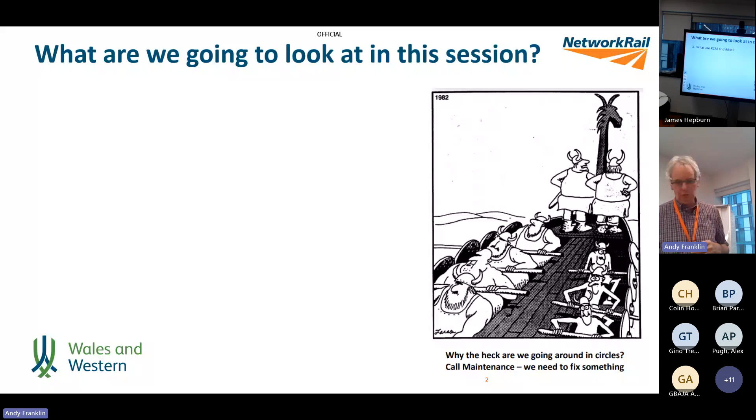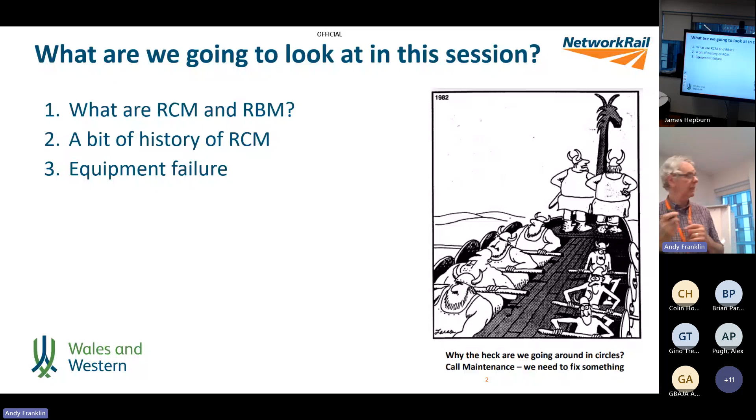And we're going to talk about what reliability centered maintenance is and why it is a very powerful tool. So we're going to talk about what is RCM and risk-based maintenance, as Network Rail call it. I put a little bit of history about RCM just so you can see where it's come from. We're going to talk about equipment failure and the key RCM questions. We're going to talk about functions and performance standards, because it's functions that we're looking at in the context of this. It's the functions of a piece of equipment, because RCM is not railway specific. It's an agnostic system. So it's the functions of that system we want to look at. The functional failures and the failure modes. So what happens? We'll have a little look at P to F curves and some RCM tasks. So this is quite a high level look at it, but I think it'll give you a flavour for how it works and why the railways adopted it.

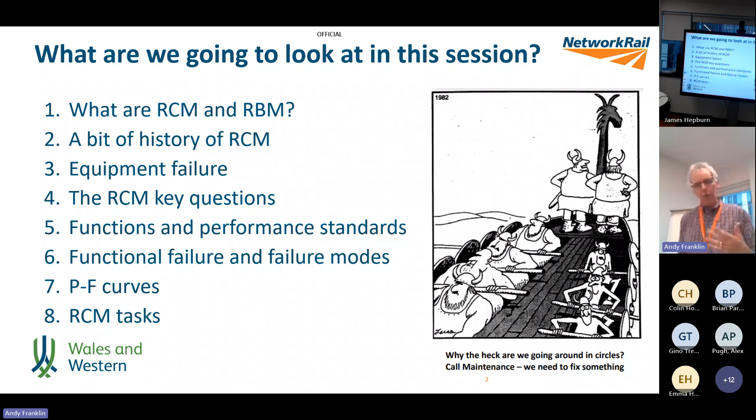So we've got two things. So reliability centred maintenance. This is an extract from a Network Rail standard: an established process which defines what maintenance is needed in order to allow an asset or system to meet the business need within a specified operating context. An operating context is really important, as we'll see later on. So that's the process, RCM. Network Rail call their version of it risk-based maintenance. So the description describes a quantitative, financially based analytical technique that establishes the relative worth of various maintenance tasks and serves as a continuous improvement tool.

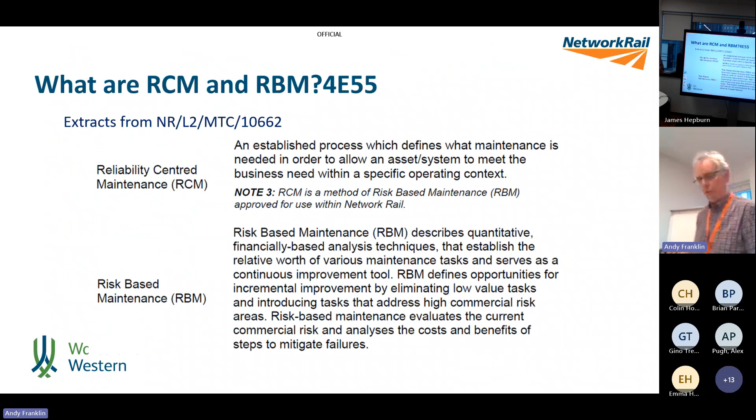And we had a very good talk on continuous improvement a while ago, didn't we? And it eliminates low value tasks and introduces tasks that address high commercial risk areas. Risk-based maintenance evaluates the current commercial risk and analyses the costs and benefits of steps to mitigate failures. And I think that's really important. So we're not just talking safety here, we're talking about performance risk, we're talking about reputational risk and things like that.

And this is an extract from a report from Nolan and Heap, which is one of the big reports. So the traditional approach to scheduled maintenance was based on the concept that every piece of equipment has a right age at which a complete overhaul is necessary to ensure safety and operational reliability. But the airline industry were the first people to really get into this in the 1950s, and what they found by analysing a lot of data, because by the 50s there were quite a lot of aircraft flying about, was that that is not actually correct. There is no right age for an overhaul. It's more subtle than that.

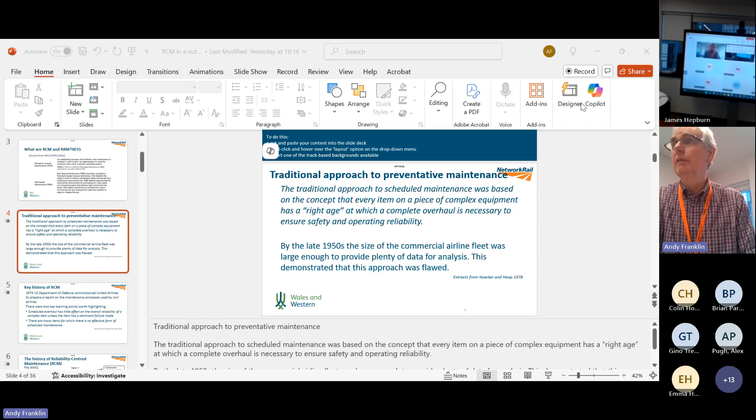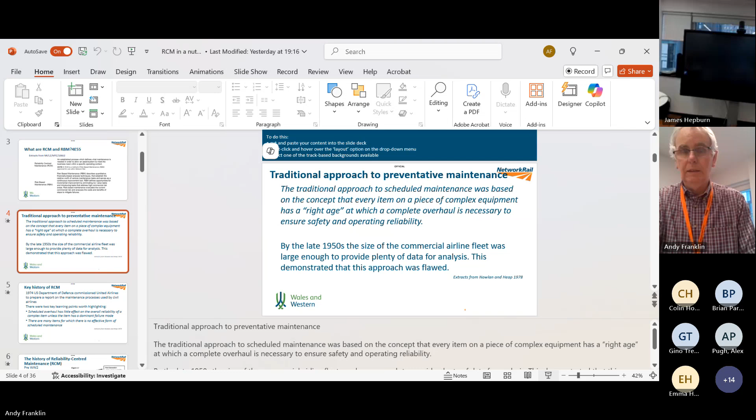So what the aircraft industry started to find was that just doing lots of overhauls didn't solve the problem of aeroplanes falling out of the sky. And they started to have a look in a bit more detail about what they were doing and started to focus in on what the tasks were meant to do, because it became apparent that just taking something to pieces and putting it back together again doesn't really make any difference. In fact, it can quite frequently make things worse.

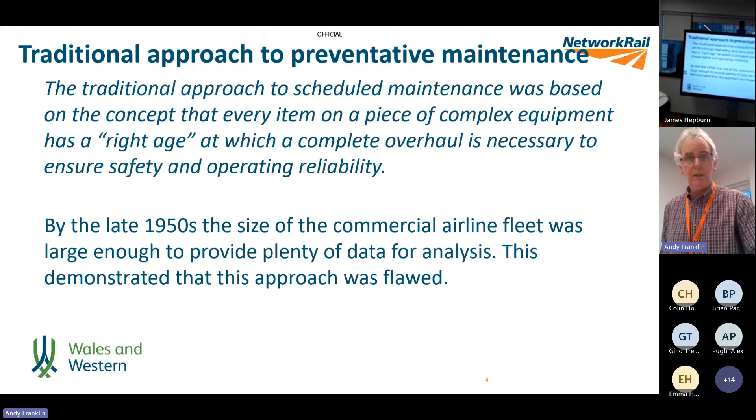And this eventually led to what we now call RCM. The name was born out of a report, Nolan and Heap in 1978. The US Department of Defense commissioned United Airlines, who were one of the big airlines in the States, to prepare a report on what they were doing in maintenance, because they'd started to see benefits coming out of it.

And I think there's two key learning points which are really worth highlighting from that. So the first one was scheduled overhaul has little effect on the overall reliability of a complex item unless it has a dominant failure mode. So there were only certain cases where scheduled overhaul becomes effective.

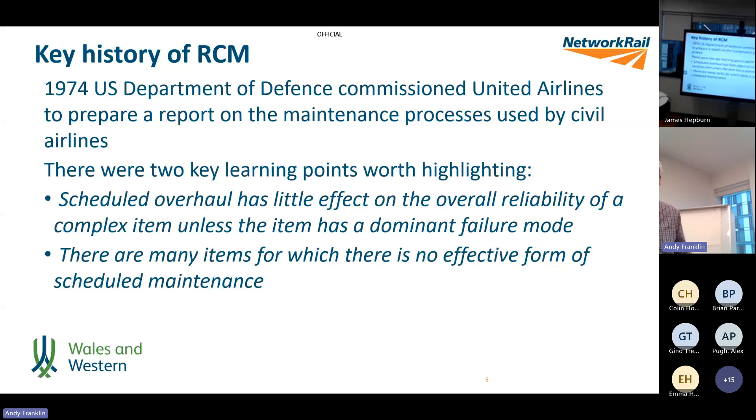And the other big one that came out of it for me was that there were many items for which there is no effective form of scheduled maintenance. So there isn't anything you can do to it which really changes its life. And I think that's quite fundamental to where we're going with RCM. So that's really a bit of background about what RCM is about, and then we'll look at how the process works.

Right. So in RCM speak, it's split into three eras. So pre-World War II: labour was relatively cheap. We're talking about going right back in time now. Mechanisation was relatively low. A lot of people were employed in factories, working on the railway and all these other things. The designs of machinery were quite simple, steam locomotives in the railway context. And they tended to be quite over-designed, which meant there was a bit of redundancy in the system, so they didn't fail very often. And they were quite easy to repair as well, so there was a minimum of downtime.

So regular maintenance wasn't particularly a driver of things at the time, and a lot of businesses worked on the basis of when it breaks, fix it. World War II and the aftermath really started to change things. We started having a real shortage of manpower because manpower was tied up in other stuff. And the demand for goods started to really grow. So we started to increasingly mechanise factories and systems and processes.

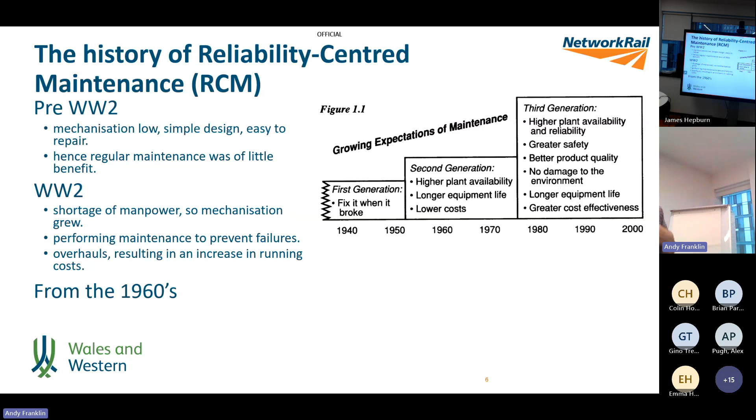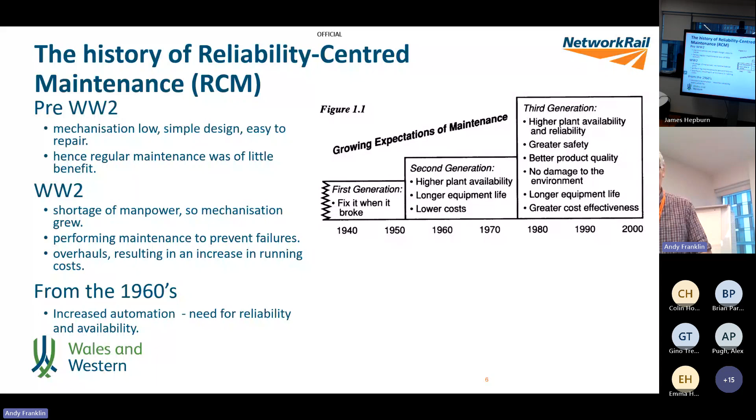And then again, from the 60s, things changed again, because we'd started developing these processes in the wake of World War II through the 50s and into the 60s. Since the mid 70s, there's been a real change in industry, particularly process industry. Downtime has always affected productive capability of physical assets by reducing output, but the combination of increased operating costs and interfering with customer service made it more important to industry to have reliable, predictable outcomes. So reliability and availability are now concepts which are really important to industry at large.

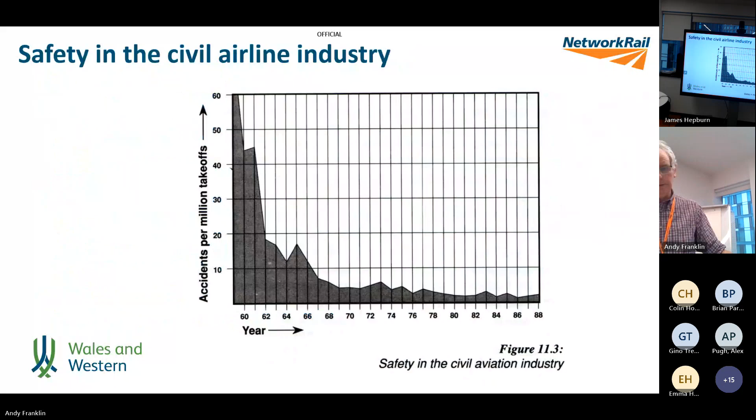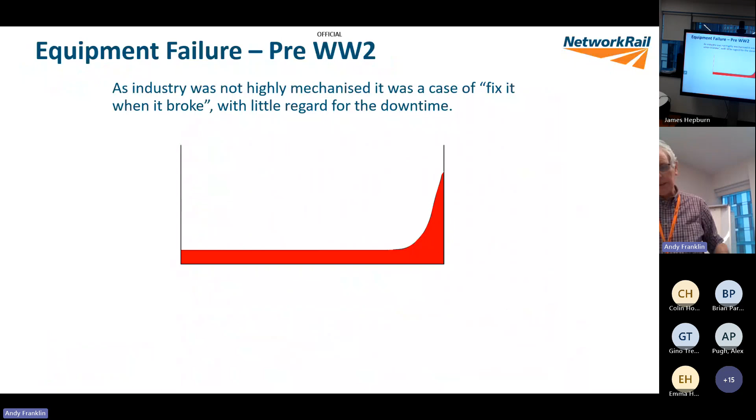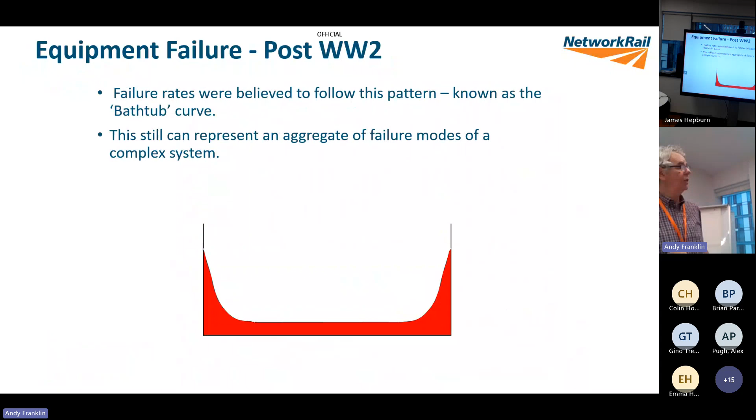Okay, but the studies actually started leading into other things as well. So another popular thing, many of you probably recognise this as the so-called bathtub curve. So this is post-World War II. Failure rates again were believed to follow a pattern known as the bathtub curve. So lots of early life failures when the thing's first installed, then it settles down to some fairly steady state, and then you get a lot more failures towards the end of the life of the thing. But in fact, the research found that there are 6 failure patterns. And we'll look at each of those in turn now, in the slides.

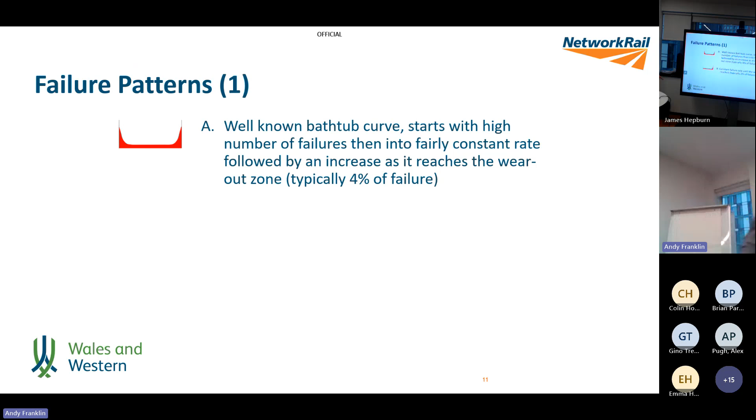So the first one is the bathtub curve. It starts with a high infant mortality, decreases to a fairly constant rate, and is followed by an increase towards the end of its life. But actually, only about 4% of systems follow that, and it tends to be more complex systems as well. So this is the next one they found, which is a constant failure rate until the wear out zone is reached. This is the one that was favoured before World War II, that it's going to be reliable to a certain point, then you need to intervene and do something. In fact, 2% of things actually follow that kind of a failure model.

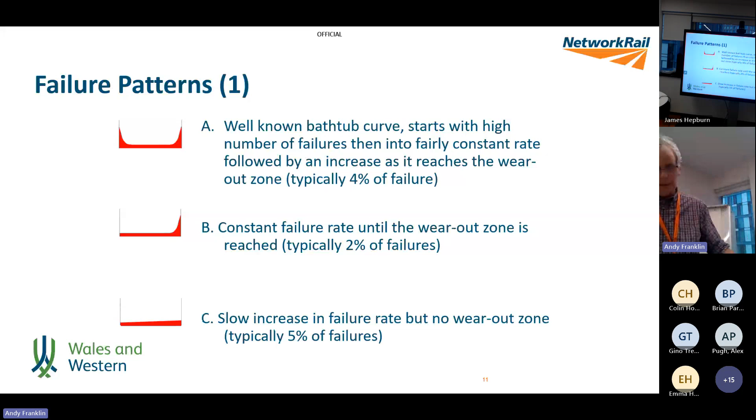Model C was a slow increase in failures. So it gets slowly worse over time, the increase of failures, but again, only 5% of failures actually fall into that category. Another model that came out: you have a low failure rate when it's new, but then it rapidly increases and you have a constant failure rate throughout its life. But again, only about 7% of systems actually follow that. So that was quite specific.

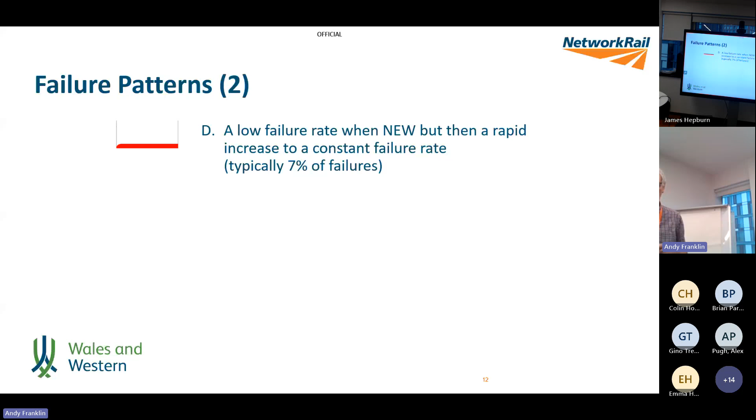Constant failure rate. So it fails at any age. It's not an age thing, it's just a random failure. And as you see, we're getting into bigger numbers now, so 14% of those things. So there's no life. There's no particular point to intervene. They just fail randomly.

And finally, number 6, F. It begins with a high failure rate. So this is the sort of bedding down when things are all new and getting to work. It settles down to a fairly constant level, but there is no wear out zone again. It's just pretty much constant from there. And 68% of cases actually follow that kind of a model. So there isn't any clear point at which you want to intervene. There's not a wear out zone or anything like that.

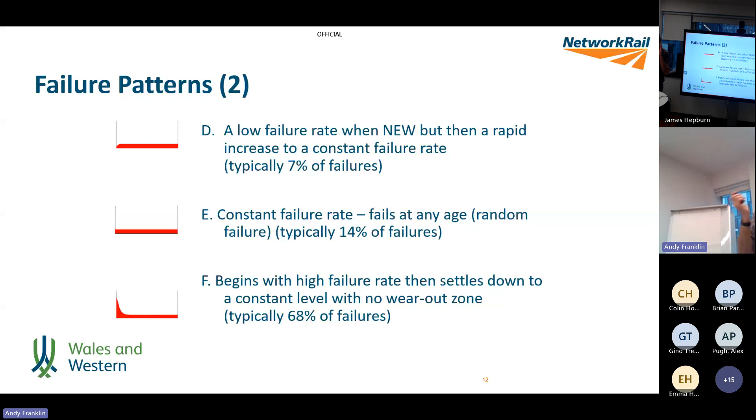Okay. So that's really the basis of starting to think about, well, what do we need to do then to improve reliability and performance? So in RCM, there are 7 questions you have to ask yourself.

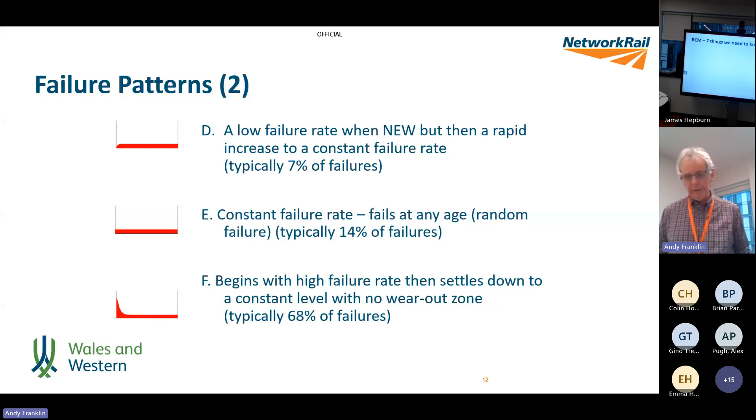So you could actually use the RCM process in the construction of something new. The Boeing 747 actually had RCM principles used in its design and construction. That's been proved to be one of the safest aircraft ever, really. Possibly slightly better than some of the newer Boeing creations.

But the questions you've got to ask yourself first: what do we want it to do? And are there any rates or tolerances around that? So can we fix what it is we want to do? And if we can, particularly be numerate about it, not just we want it to work all the time. We want it to work 99% of the time or whatever. How does it fail to do what we want it to do? So having identified what the function is, how do we lose that function?

What causes it to fail that way? So what are the root causes behind the loss of functionality? What happens when it fails in that way? Because clearly the consequence is going to have an influence on what we want to do about it, isn't it? When it fails in that way, does it matter? So what can we do to prevent or predict this type of failure? So what tasks, and you'll see about the tasks and things that we can do in it.

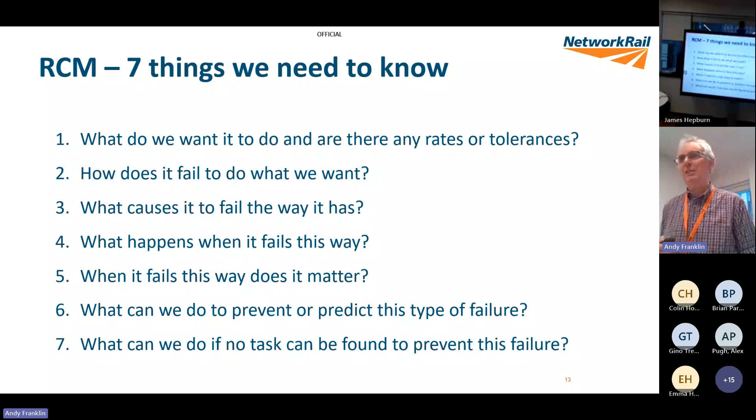And what can we do if you can't find a task to prevent this failure? So they're the 7 questions which form the underpinning. They all look quite easy, but answering them isn't necessarily particularly easy. So let's first start with function and operating context.

So we need to determine what the users want to do within the boundaries the asset is expected to operate. And we then need to ensure it can do what the users want to do to start with. So that's really important. So again, it's functions, and then we'll have primary and secondary functions. So why is the asset required in the first place? So for an example, an office chair. A primary function of an office chair is to support up to 200 kilograms of occupant in a seated position.

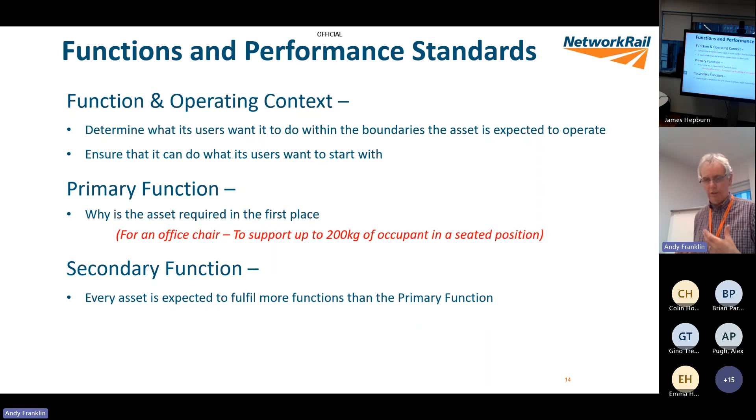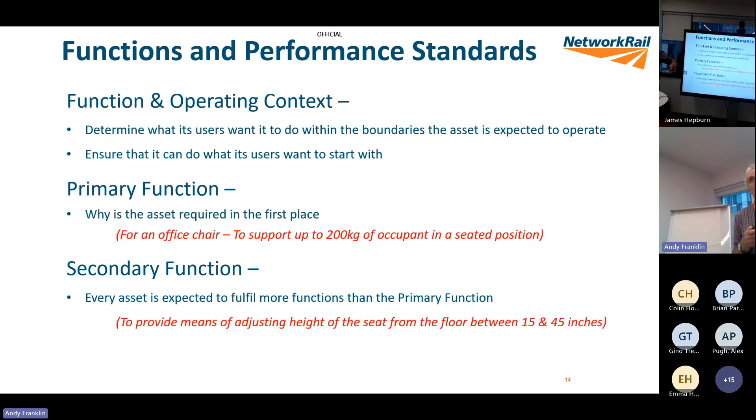So that's a simple primary function. But most things have many functions and they'll have secondary functions as well. So every asset is expected to have more functions. For our office chair, another function might be to provide a means of adjusting the height. There's probably a requirement for it to be safe, isn't there? One leg and a disc is a stool, you can sit on it, but is it safe? Things like that. So we end up with a lot of functions, and a lot of the analysis goes into thinking about what the functions are and how the functions can fail.

Okay, all follow it so far? It's all gone very quiet in there.

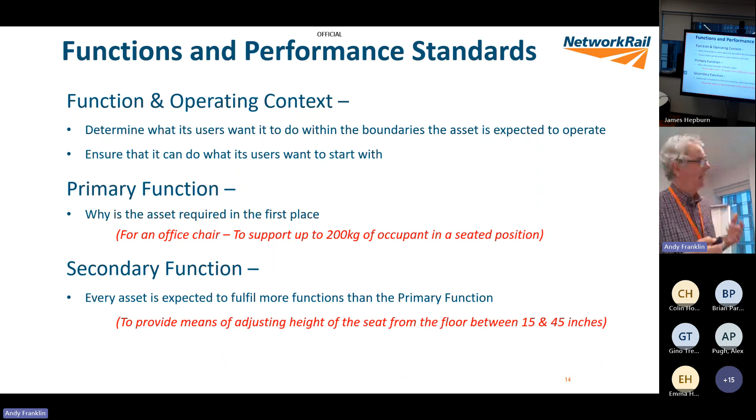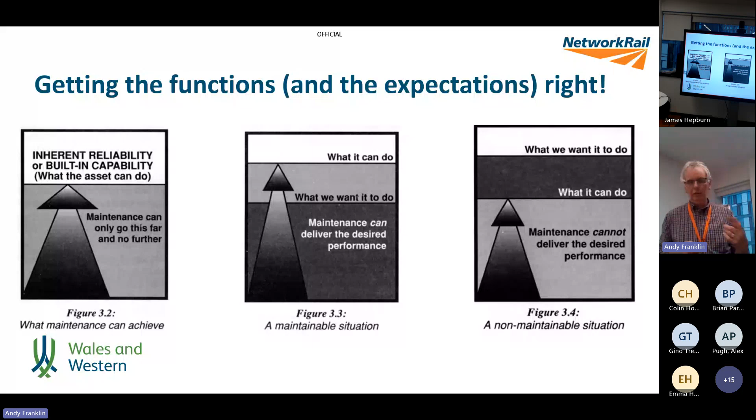But frequently we end up in the third situation, don't we? What we want it to do is up here. What it actually can do is here. And that's as far as maintenance can take it. We need to be very conscious of that, so when you start applying RCM in the real world, is this asset actually going to do what you want it to do anyway?

So take an example of a bridge: you want to run 25-ton axle weight traffic over it, but it was designed for 18-ton axle load. Just upping the tonnage going across it is too simplistic, isn't it? Because you sacrifice things. You either sacrifice life in terms of fatigue damage, or we have to have enhanced maintenance or whatever. So it's quite important to remember that maintenance can only achieve what the thing was designed and intended to do. And that's really, really important.

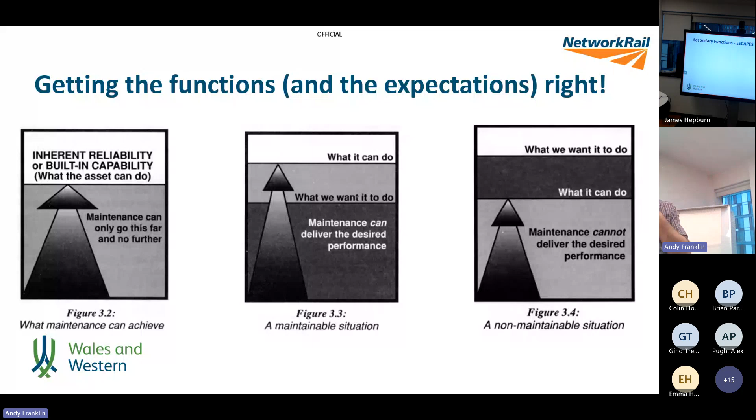So secondary functions cover a wide range of things and are often described by the mnemonic ESCAPES. Their relative importance will be dependent on the primary function and the operating context, and we'll look more at operating context. So E is environmental integrity, S is safety, C control, containment, comfort, A appearance might be important with some things, P protection, E economy, efficiency, and S is superfluous functions. So these are things which aren't directly related to what the primary function is, but they are things which are still important to the user.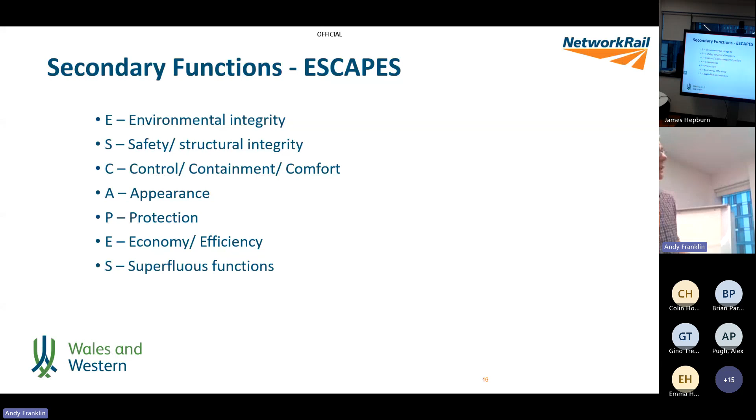Okay. So what does that look like in terms of railway? If we think about the functions of track, we spent a lot of time analysing track, and we ended up with 18 functions, and we've got 6 here. So obviously this is a pretty primary function, isn't it? To support and guide trains with the published axle load, line speed, and million gross tons per annum. So again, making it numerate. We want to support and guide trains, but we also want to do it without restrictions for weight, without restrictions for track geometry and things like that.

Must continue to operate in all local weather or seasonal variations. Must be a safe environment for anyone on or about the railway. Must provide an acceptable level of comfort to passengers. So we're getting into secondary functions now. Must not pollute the surrounding environment. And then there's clear secondary functions like provide a traction current return for the overhead line and third rail systems. So there's 18 functions in all. Some of them are just to do with mounting equipment on the track, but I think that gives you a flavour for what we're doing. So these are the functions that we don't want to lose, and these are the functions we then start looking at about how we can lose them.

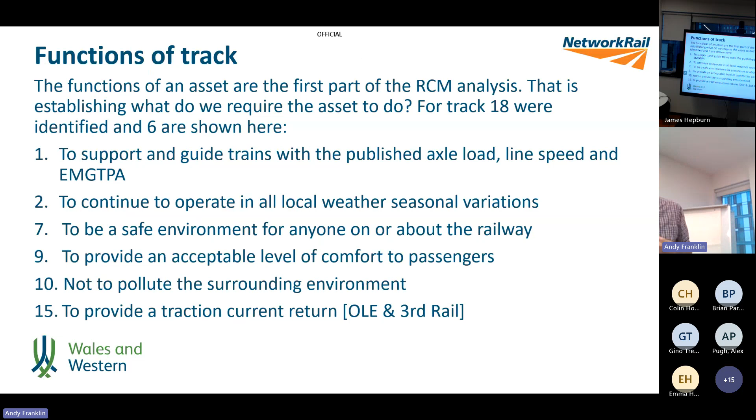So we have functional failures and we have failure modes. When an asset is unable to fulfill the function at the specified rate or within the set tolerances acceptable to the users, then it's said to be functionally failed. So in terms of our chair, we may be unable to adjust the height of the chair. That would be a functional failure, in the context of that. And the failure modes then describe events that are reasonably likely to cause the failed state. You do need to be careful to avoid meteorite strikes when you're doing the analysis, because they do happen, but you've got to be realistic about what's likely to happen. An example of the failure mode for that one would be the height adjustment handle has broken off, so you can't adjust it. The functionality we've lost is the ability to adjust the height, but the actual failure mode is we've broken the handle off.

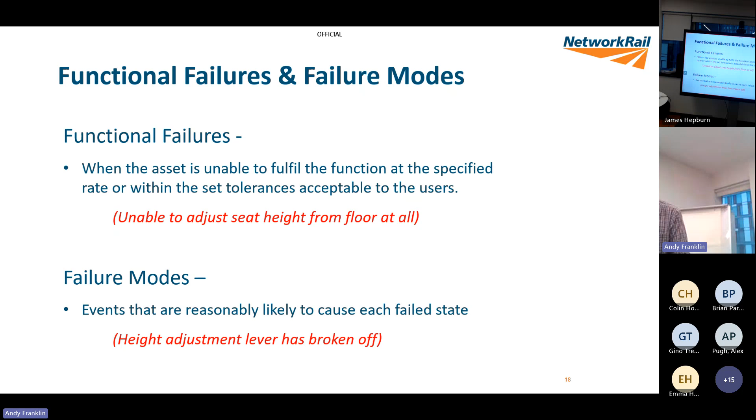So we carry out basically failure modes and effects analysis, or FMEA, and we use that as a step-by-step approach for identifying all the possible failures in a design, a manufacture, or an assembly process, or product or service. So it's quite a lengthy process. Track is actually quite simple because we don't have hidden failure modes. But that's quite a big piece of work, which is the core of it. And then we also do a FMECA, which is the failure mode effects and criticality analysis. That extends the FMEA by including criticality analysis, which is used to chart the probability of failure modes against the severity of their consequences. So hence the importance of knowing the operating context. We keep coming back to that again and again. As I say, I try and avoid meteorite strikes.

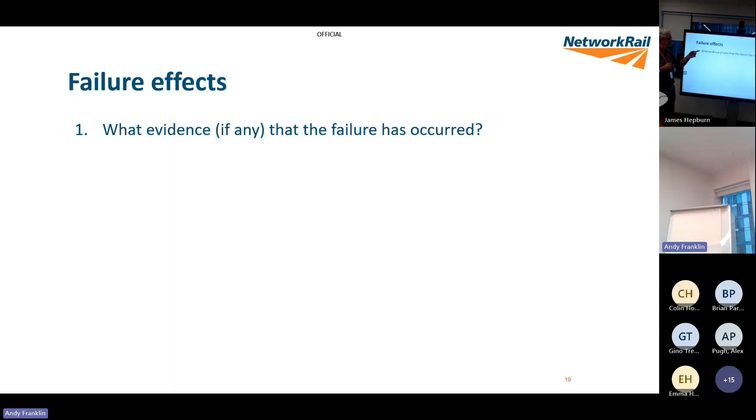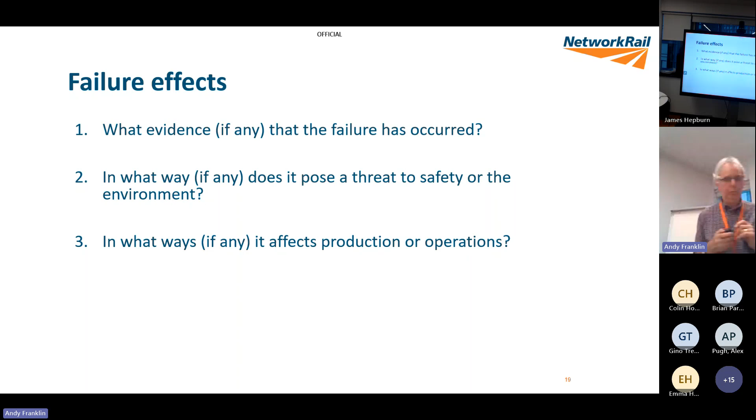So we now start thinking about failure effects. And again, there's a series of questions you ask as part of the analysis. What evidence, if any, is there that a failure has occurred? In what way, if any, does it pose a threat to safety or the environment? In what ways, if any, does it affect production or operations? What physical damage, if any, is caused by the failure? And what must be done to repair the failure?

So when doing your analysis, first of all, is it evident? Is there any evidence of failure starting? So with track geometry, you might start to lose track geometry. That's the start of the failure. You can recognise that, you can measure it. If you can't measure the evidence, you can't really do an RCM analysis on it, because you won't have any time. So an example would be a light bulb. Those of you old enough to remember filament lamps, what's one thing that tends to happen just before it goes?

Gets brighter, doesn't it? Yeah. And is there enough time to do anything about it in that interval? No. So it's not a useful interval. So again, we need to think about this one; clearly, originally it was all about safety, but these days we consider the environment as well.

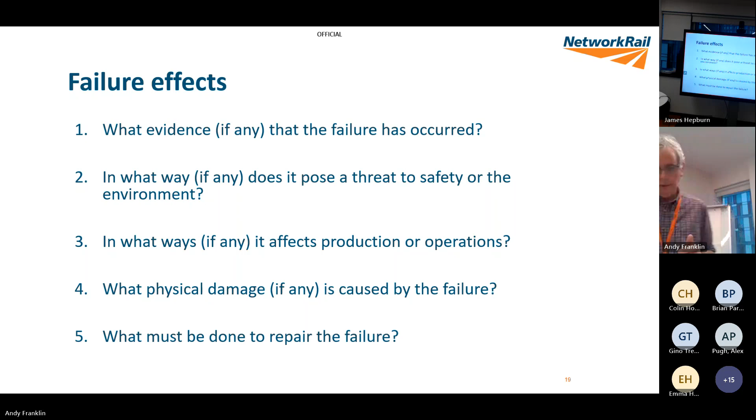And if we think of some of the recent really nasty accidents, Chernobyl, Bhopal, Piper Alpha and things like that all had huge environmental as well as safety consequences, didn't they? So those are the questions that we ask ourselves. And the answers then start to come out in the failure consequences. So we have hidden failures, safety and environmental consequences, operational consequences and non-operational consequences. And these are all quite straightforward, really.

So first one, it has no direct impact by itself, but can lead to multiple failures, which can have serious consequences. And a really good example of that is something like a smoke detector or a standby generator. When do you find out the standby generator won't start? When you need it, don't you? So when it switches over to the standby generator and nothing happens. You find out your smoke alarm isn't working when your house is on fire, don't you?

So you can do things to check that it's functioning properly. You can test it, but you will never know until it happens for real whether it is working or not, won't you? So hidden failures are quite an important thing, and they are something that, as you build complexity into systems, you need to be wary of, because you're introducing new failure modes, aren't you?

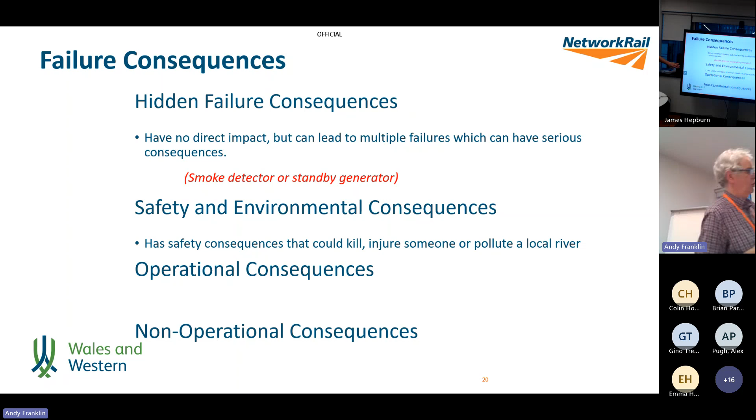Okay. So, right. Safety, environment. So it has safety consequences that could kill or injure somebody or pollute the environment. That's fairly straightforward. And again, if it's got these consequences, you can't just ignore it, can you? You've got to actually take action. Yeah.

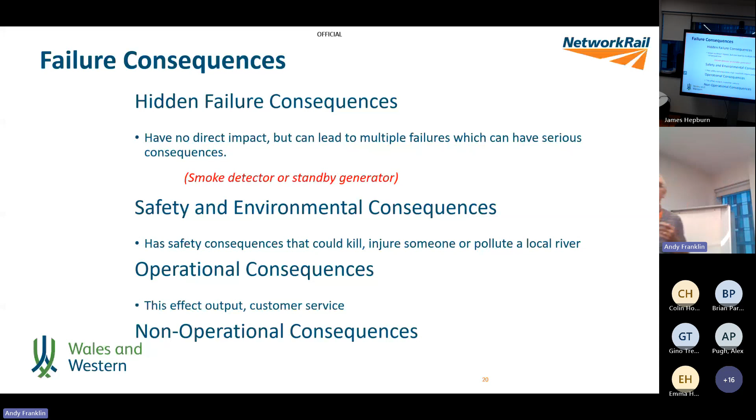Operational consequences. Now, in some cases, there may not be any safety consequences. If you're making widgets in a factory and the machine stops, the world can probably live without widgets. So it doesn't have any safety consequences, but it can really bugger up your operations, can't it, in your factory, or it can stop the trains or whatever. So that's the next level down. We're thinking about that, customer service and things like that.

And then there are things which are evident failures that don't affect the operation and do not increase cost above the repair costs. So these are, if you like, the lowest thing. So yes, it's failed, but it doesn't really have any great consequence. Which is clearly also going to colour what you're going to do about it and how much effort you're going to put into them.

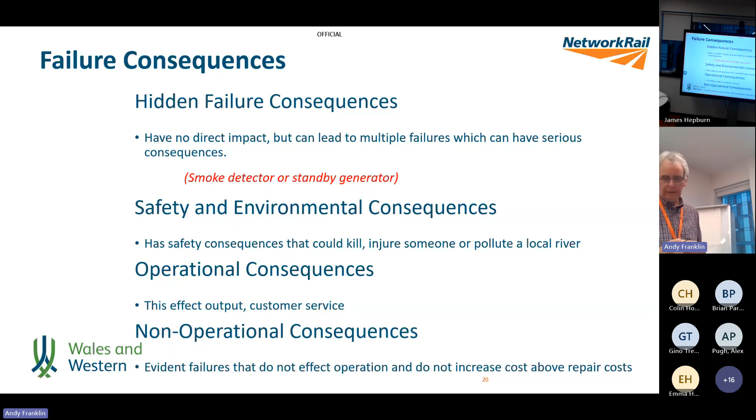Okay. So I say in track, we don't have many hidden failures, but obviously we tend to have things which fail wrong side as well. But we don't have much that doesn't have operational consequences, do we? So if you think of it in a track context, whether it's a broken rail or a rail defect or whatever.

So having done all that analysis, we then, in the context of RCM, start looking at what you can do about this. And we'll come to the charts in a minute, which will hopefully bring it all together a bit more. So we have three different types of tasks, and they're proactive tasks. We have scheduled on-condition tasks, scheduled restoration tasks, and scheduled discard tasks.

So for the vast majority of things, and this is certainly true of track, we get a warning, don't we, before failure. They're called potential failures. And they identify physical conditions which indicate that a failure is likely to occur or is in the process of occurring. So things like vibration monitoring is used in plants and machinery. We use track geometry. So the first report of deteriorating track geometry is a really good warning.

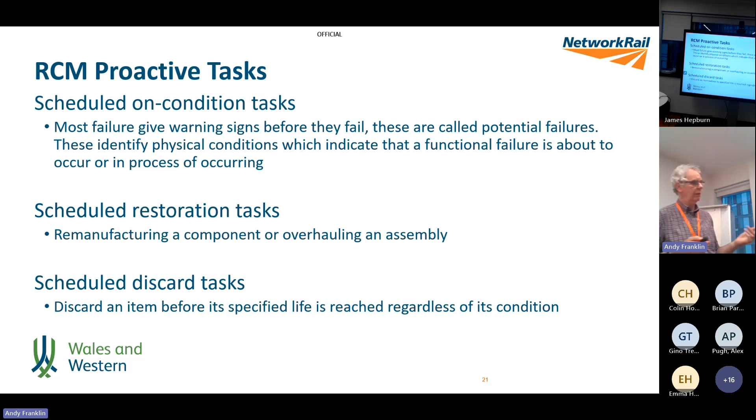And then the final one is a discard task. So we talked about light bulbs, didn't we? So if we do a statistical analysis of how long a light bulb lasts, you can with some certainty produce a good normal distribution, can't you? Very few of them fail quickly, and very few of them go on to enormous lengths of time. So, for instance, something like signal lamps, it's changing now with LEDs, but with signal lamps, you could say, right, I want to catch so many percentage before they fail.

You could actually fix a life in hours, couldn't you? And say that at the end of this period, I'll just take the bulb out and throw it away and put a new one in. And that way you would eliminate the numbers of failures, wouldn't you? Yeah. But you need the statistics to support that. So, but that's the thing.

In track, a scheduled discard task is changing the pads. That's come out as that. It's probably not worth waiting till they've worn out, because by that time you've possibly buggered the sleepers and you've probably got rail foot corrosion problems. You're probably better off, based on your site conditions, saying that after 20 years, 30 years, 50 years or whatever, we'll just throw them away and put new ones in. Yeah, don't wait for it to fail. Okay.

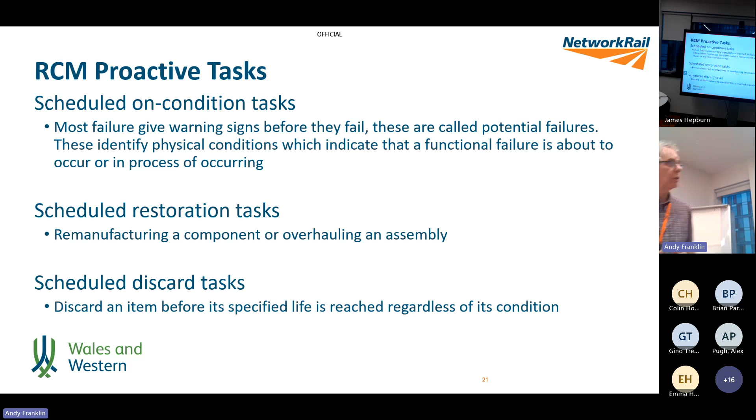So what are the actions that come out? When we go through the chart, it'll all become clear. But so what are the default actions that come out of it? So it's failure finding, which is checking the hidden functions to find out if they have already failed. That's always a difficult one. So we get into things like standby pumps, standby generators, and all that kind of stuff.

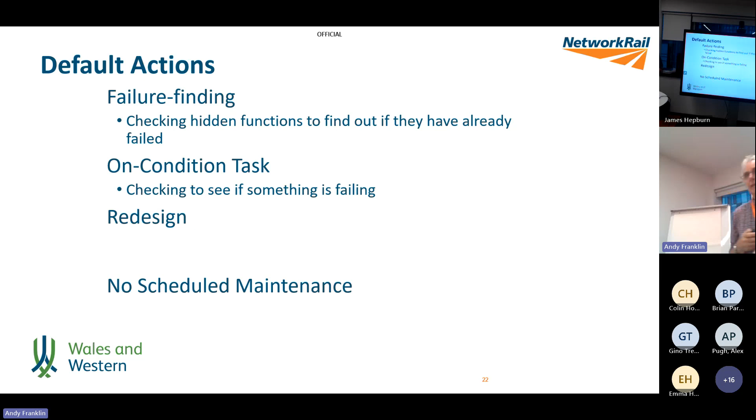We do on condition tasks. And this is probably the most common one in track: we go out there and we actively look at a particular period of time to see if something is failing. And we establish those using the P to F curve. We can establish how often you need to look to make sure you will always pick up the early signs of failure.

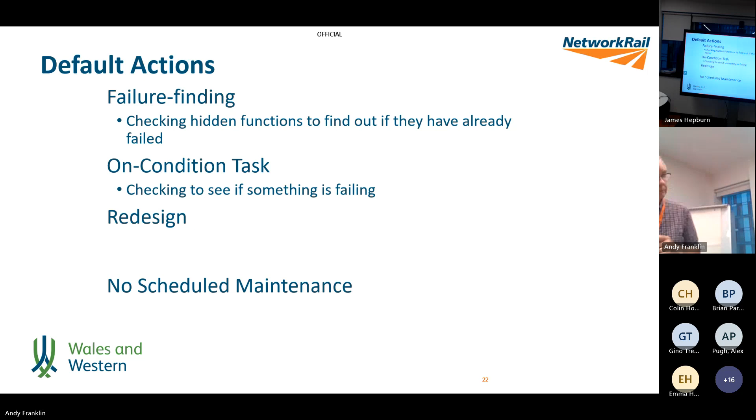Redesign is quite important. So if you're coming down and you find you can't do failure finding or on condition, you're really going back into redesign. Now, redesign might be about redesigning hardware, but quite frequently it's about changing the procedures, retraining people and things like that to actually change the way we do things. So redesign, and you can come down to compulsory redesign, is about when these things are not practical. Yeah, basically. So redesign does come into it.

And then the final one is no scheduled maintenance. So nothing can be done to prevent or predict this failure, and we just let it run on. Bulbs are a good example, aren't they? At home, none of us put in preventative maintenance for light bulbs. You might have a light bulb spare in the cupboard that you can replace it with, but we don't attempt to stop the light bulb failing, do you? Okay.

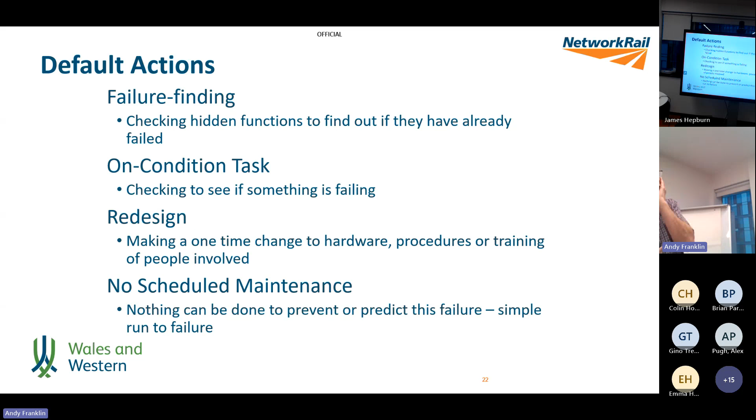So, statistical analysis: I mentioned right at the beginning, in the 50s, the aircraft industry started compiling all sorts of statistics and looking at different things to try and actually work that out. So this is coming back to our number of failures time curve that we looked at before. So the mean time between failures is the average time the asset lasts before it fails. Then we're talking about changing light bulbs and things like that. So if we replace it at a time scale before mean time, then we'll actually eliminate some of the failures.

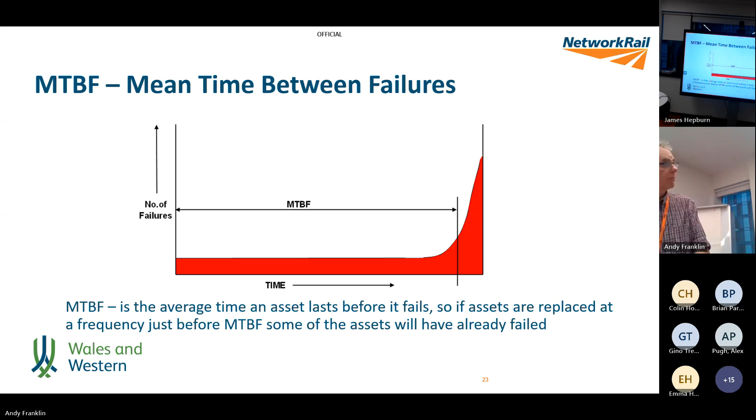So this is it, basically. So if you do give the asset a life, identical assets operate reliably for a period of time before they reach the wear out zone when they're likely to fail, and performing preventative maintenance at or just before that will lower the numbers of failures. But determining this life is quite difficult because obviously there's a lot of statistical randomness in it.

So again, it depends on the consequences of failure. If this means the light goes out at that point, if you've missed it, or if it means the airplane falls out of the sky, it's a rather different set of consequences. And so statistical analysis is really important. But how do we actually do that for something like track?

So what we use is a P to F curve. And I think some of you have been bored by P to F curves from me before. So this is the P to F curve. So this is the function of the asset. So this asset here is functioning really well. Point P is the point at which, to use RCM speak, the operator can see that it's starting to fail. Okay.

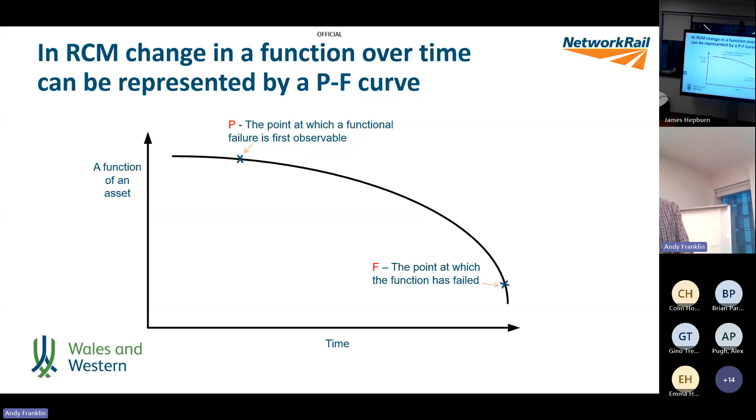So for a given operating context, we use track category, which is line speed and tonnage, don't we? We can work out, if no action were taken, how long it would take to get from point P to point F. So here's a track example. Our function is to support and guide trains with the published axle load, line speed and tonnage. So the first thing we'll get probably is an alert limit geometry fault. There's nothing to worry about; there's no mandated action for that. But as soon as you've got that, you can start planning to do the work.

If you just leave it, eventually an intervention limit track fault will occur, or we'll get a rough ride report. So we get into a short timescale where we've got to do something about it now. We might end up with a speed restriction on it and potentially even a derailment at the end. But that's gone way past our point of failure, isn't it? The point of failure is when the train's no longer being supported and guided at line speed. Okay.

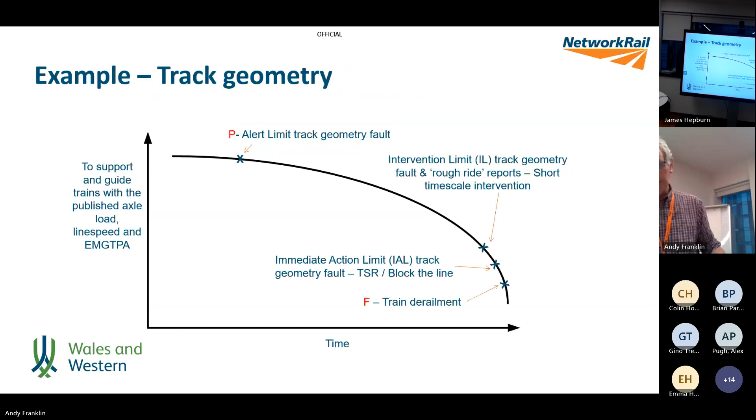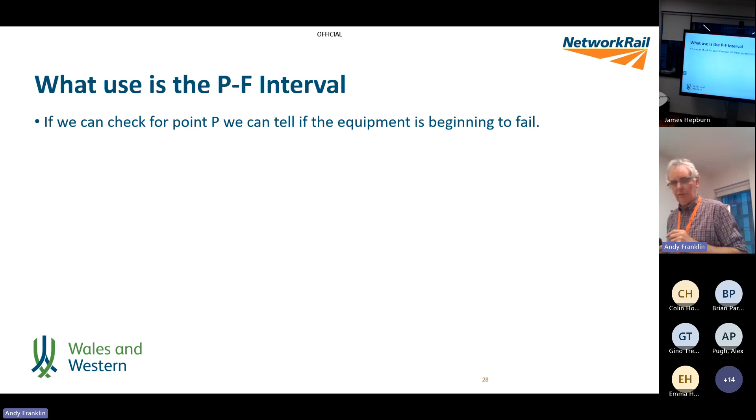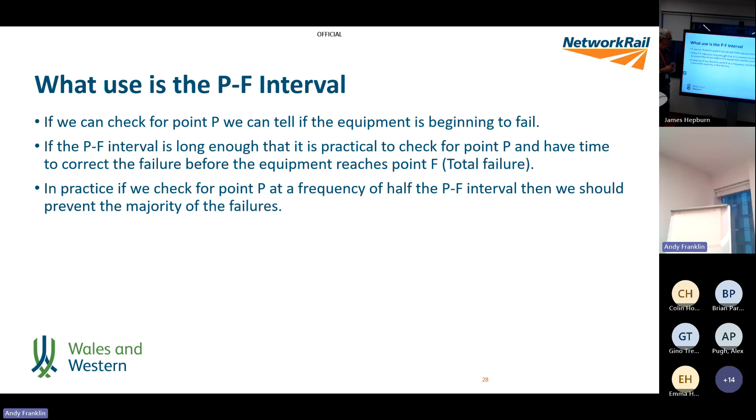So what are the implications? If we can check for a point P, we can tell if the equipment is beginning to fail, which allows us then to do some particular task on it, if the P to F interval is long enough that it's practical to check for point P and have time to correct the failure before the equipment reaches F. In practice, if we can check for point P at a frequency of half the P to F interval, then we should prevent the vast majority of failures from actually occurring.

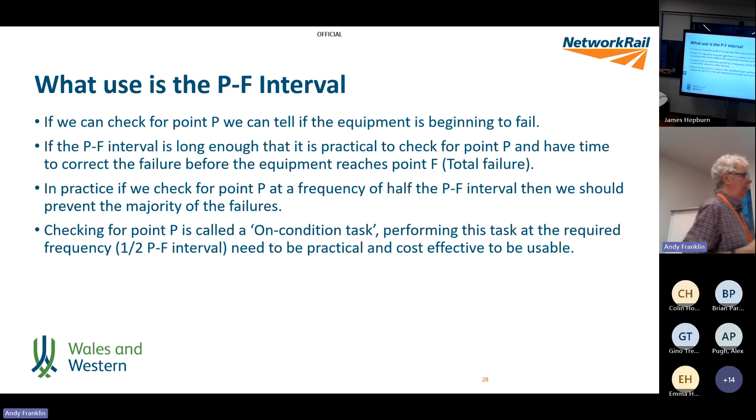And checking for point P is called an on-condition task. So it's performed based on the usage, in terms of where this asset is located, at half the P to F interval. So go back to that again. If you ultrasonically test at half that interval, you'll be sure of always finding them, won't you? Yeah.

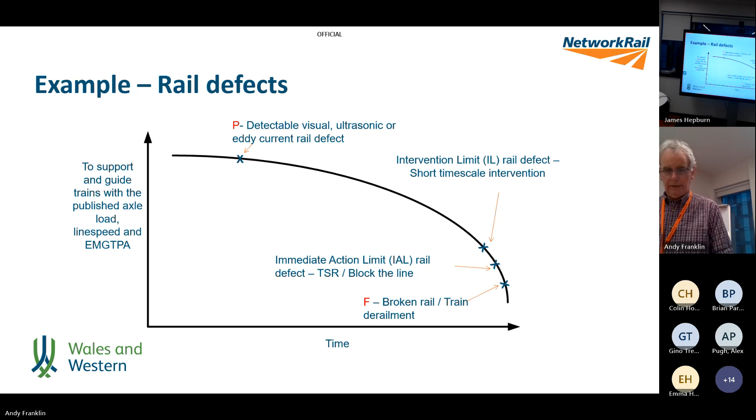Good. It's all making sense. Okay, so P to F interval is the time between the occurrence of the potential failure and the failure occurring, and you can see it there on that chart. Okay.

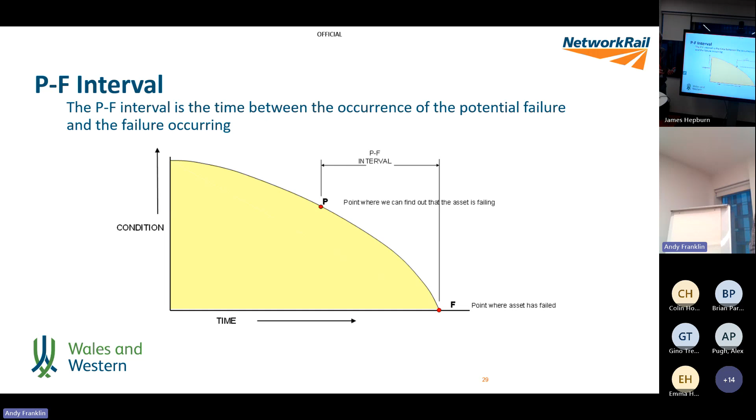So what are the benefits of, I mean, I think one of the huge benefits of RBM is it is a very proactive approach. So if you find this fault and you deal with it up here, what's the risk of a broken rail? What's the risk of a rough ride report? They're all very small, aren't they?

And I think there's a bit of a tendency in the railway at the moment, because we've got a culture of compliance to standards, and we tend to operate down here. So we find the thing, we sort of fix it, but we don't necessarily restore it back up to here. We tend to be working in this area, things like geometry. We don't do enough proactive work. So I think the challenge is actually working out how you get from here to here.

But where we have done reliability centred maintenance, it has actually been very successful, provided you do it properly. Yeah, because it really encourages you to get things fixed quickly, as opposed to waiting till you have to do something. So whatever you want to say, anything on that? No. Unfortunately, some of the senior management don't get it yet, but there we go.

So earlier intervention allows more time to fix the defect, and the defect will be smaller as the rectification will not be driven by MAC codes. So this is how you save money out of it. What you're fixing here is a little defect, isn't it? Something that's simply fixed, doesn't cost a lot of time and money. You can plan it when you want because you've got loads of time. It's often years. So you can give yourself a generous time to plan the work, to plan the access, to scope the job properly.

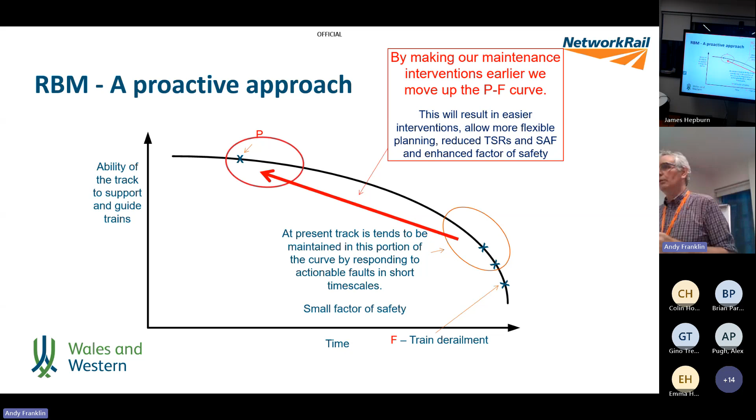You're going to get the planning there and say, no, it's not a next week job, it's a this week job. Well, it is a change of attitude, and that's one of the reasons I did this paper originally, to talk to some people who are doing RCM or having problems with some of this, because it is a complete approach. Once you've decided you're going to go down this route, you can leave yourself longer, you eliminate lower inspections, but you've got to do the actions which you've agreed in your analysis are the way to manage this, which is to intervene and do something within a certain time scale and things like that. Okay?

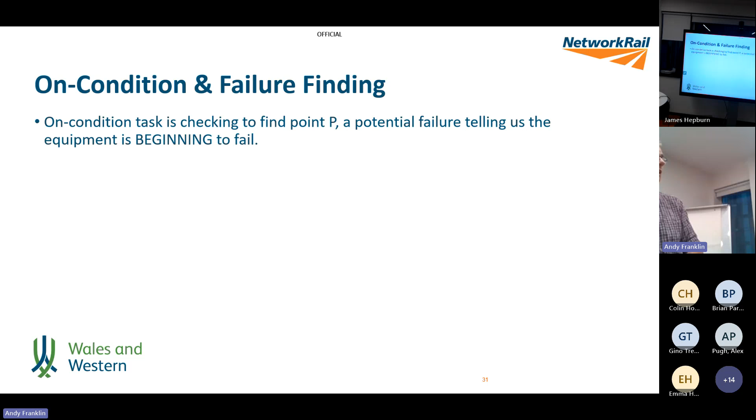Right. So an on-condition task is checking to find the point P, the potential failure, where it's beginning to fail. And failure finding is checking to find a hidden failure. So these are failures which are not evident to the users. And it's done by performing a failure finding task, and we can see whether the device is still capable or not of performing its function. Yeah, and I say it's mainly to do with protective devices.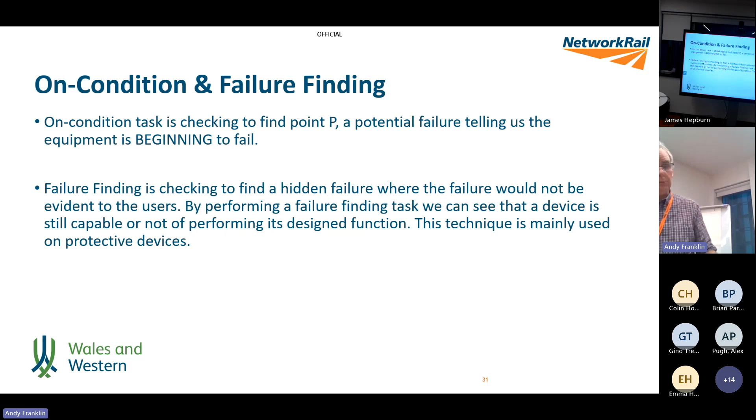So for each of the failure modes being established for a different type of equipment, we use the decision diagram, which is this thing, to work out what, if any, maintenance task we could or should perform. And for each failure mode, after working through the decision diagram, we have an outcome, which will be one of the following: a scheduled on-condition task, a scheduled discard or restoration task, a scheduled failure-finding task, a redesign, or no scheduled maintenance.

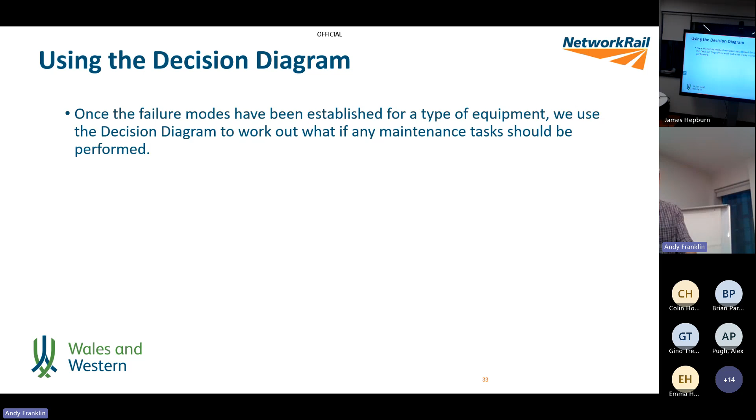What's happened to that? That's it. That's the wrong button.

Okay, so let's think about the music festival first. So, will the loss of function caused by this failure on its own become evident to the operating crew under normal circumstances? Yes, because the lights will go out, won't they? So we come down into here. Does the failure mode cause loss of functionality or secondary damage which could have a direct adverse effect on safety or the environment? It's debatable. The lights are going to go out, aren't they? Yeah. So if you say no, yeah.

So does the failure mode cause loss of function or secondary damage which could have a direct adverse effect on the operational capability? Well, yes, it will when the power's gone off, so the music's gone off and everything else. So it comes down and it's an operational evident failure. Okay. If we go back to the other chart, we've got an operational evident failure.

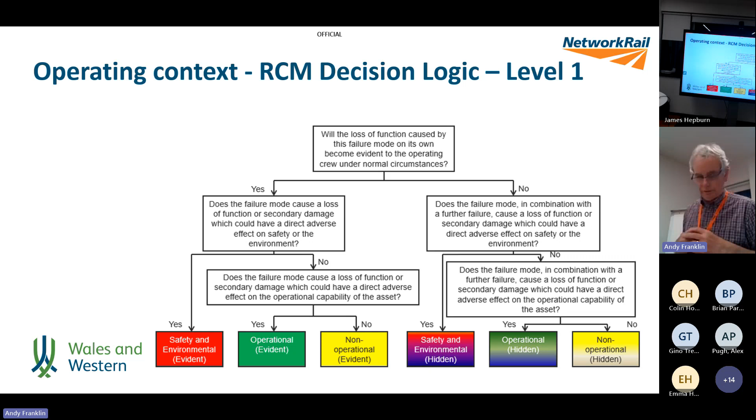Yes, it certainly will, won't it?

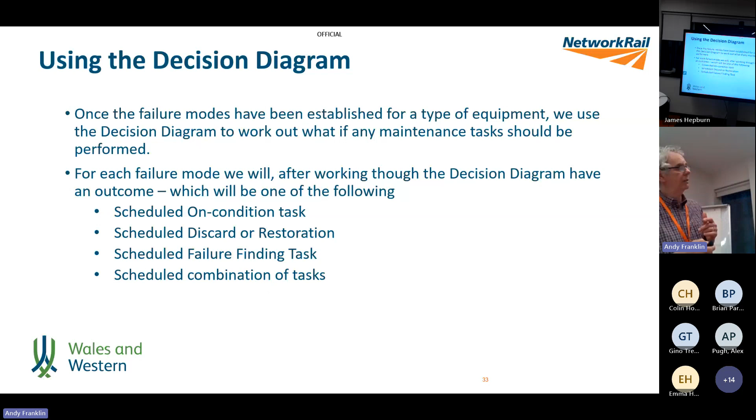Okay, so we come down this one to the safety and environment. And again, if you go back to the other chart, you can see how the different tasks work. So the operational one, non-consequential operation one. So again, is there something you can do to stop it happening? If yes, you can do. If no, then we just go to scheduled restoration task.

So you could say, well, could we just replace the pump after so many years or whatever? But again, yes or no. Notice in here it also says, is it technically feasible and worth doing? Because the fact that it's technically feasible might not mean it's worth doing. That's a business decision, isn't it?

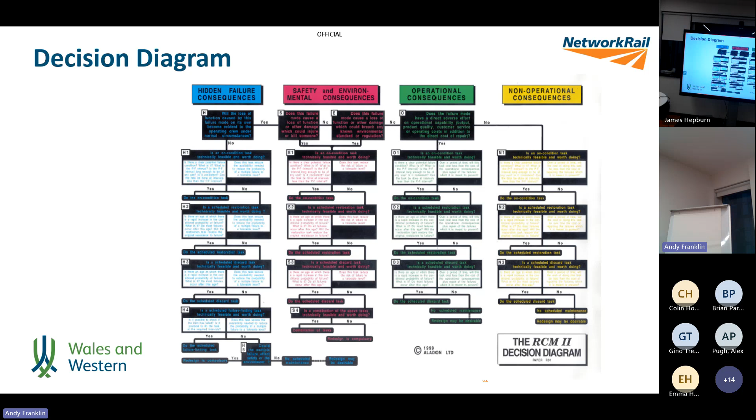Yes. We have a brilliant technical solution for cracked rail ends called cold expansion. And we cold expand all new holes. Is it worth going back and cold expanding the holes in our existing jointed track? It would be nice and it would solve the rail end failure problem, but it would be so expensive. Unless the rail's going to remain there forever, it's not worth doing. So as you see, you can come down to here, things like scheduled discard and things like that. Okay.

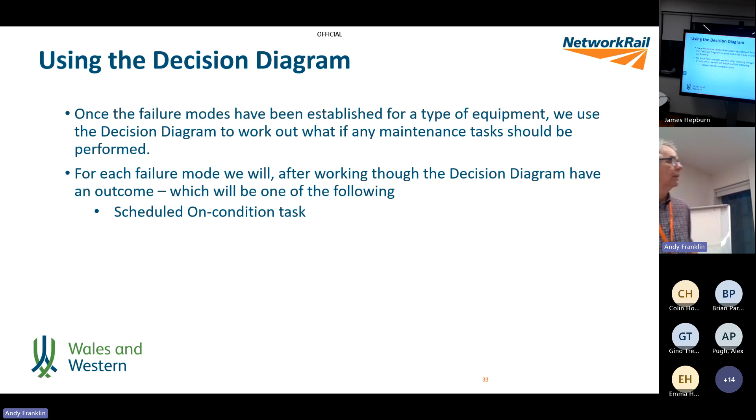So how are we doing for time? Right.

So that's the full chart as in the book at the moment. So as you can see, we've got the four legs. So hidden, safety, and environment. Environment wasn't really in it originally, but that came in later, I think as people became more aware of the implications of that thing, and then we've got the operation side here. Now you notice that some of these come down.

So if you're coming down here and you can't do the yes, you then have to start thinking about compulsory redesign. So that means looking at the process and systems and things like that. So what it's effectively telling you is you've got something which can cause serious problems as a hidden failure, and we haven't got an effective means. So we've got to think of another way of managing the problem.

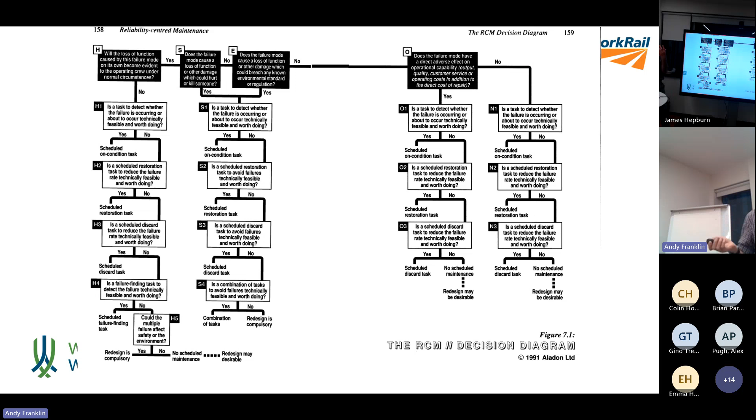Same with the, it does bring you down. It rarely brings you down to that one. But certainly in Network Rail, we've had several redesigns, because we highlighted some failure modes we didn't realise we had. Chair screws, actually our controls on broken chair screws were really, really weak when we did the analysis. And there's nothing much in 001, the existing maintenance standard, about it at all. It tells you to do something when you find them broken.

But you then get into the question, well, how often do you have to go and look? How many can you tolerate before you? So we're introducing some checks on that based on condition and various things into the new standard. So, right.

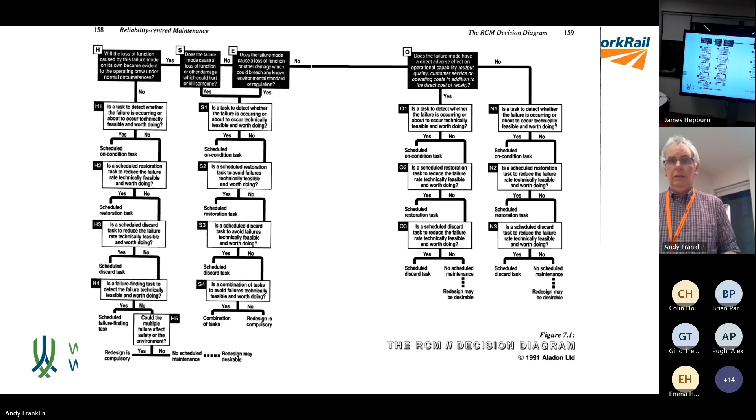Right. I hope that made some sense. Any questions? Any questions online? Yes, Andy. Alex. Yes. Number one, thank you.

Fantastic presentation as always. Just a thought on modern sensors and AI, and its impact on RCM. Obviously my concern is the danger of garbage in, garbage out, and the need to have a human intelligence and overview. How do you think it would be if you redid the analysis done in the 50s and 70s given modern AI, etc.?

Well, it would certainly have an effect. I think AI could be a help because it can crunch through a load of data very, very quickly, looking for patterns and things like that. And the work we're doing with Insight, which is our new engineering support tool, has already started doing that because as well as track geometry, it now has whether the earthworks are in good condition, whether it's in a cutting or an embankment and all sorts of stuff. And that's already starting to throw up some interest. So I think AI could help.

But again, the big risk with it is actually producing false results. If it can't report the BBC News accurately, we don't want it reporting other things. But more to the point for me is just buying the whole concept that once you've found this thing, you just deal with it, while it's small and easy to deal with. It doesn't take a load of time or a load of people. Because once it's dealt with, it's gone from the system and is no longer a threat.

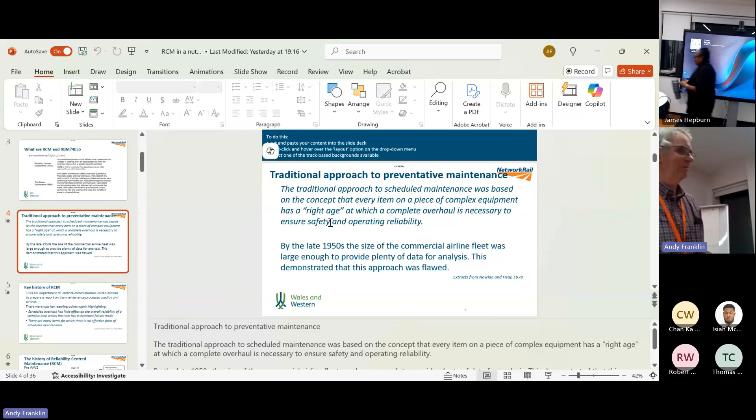Thanks, Andy. Brilliant. It's now an oil tanker at the bottom of the North Sea. There was a collision this morning, wasn't there? Yeah, I saw the pictures of it. It's pretty dramatic, wasn't it? Tanker was well ablaze. That doesn't make it end up on the bottom. Exactly. I'm asking the question. Right. All right. Sounds good.

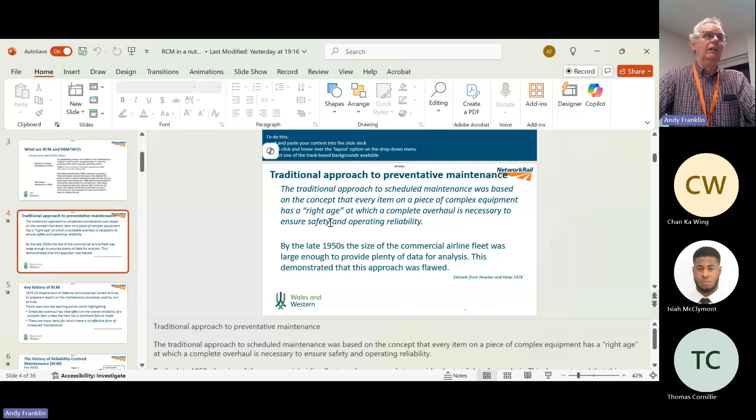I think we need to revisit something, because I think I originally did this at Bristol. Because Bristol, as you know, had some problems with some of the stuff they'd done under 663. They'd been